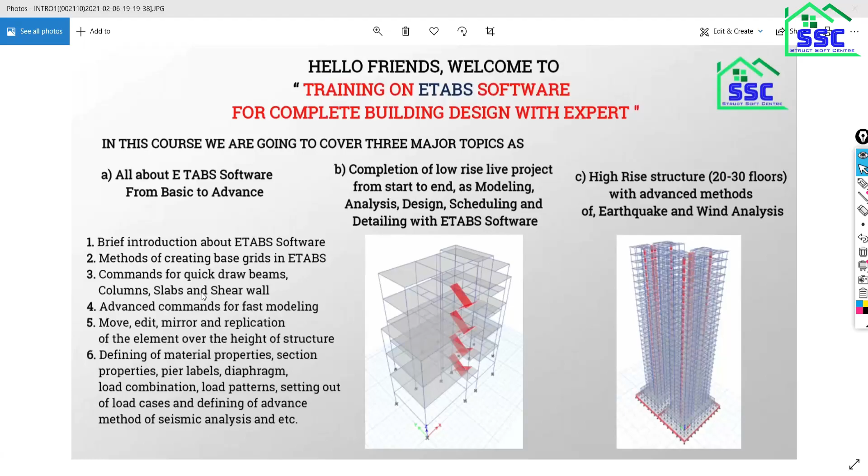We will check the stability of the structure with the advanced, new codes for high-rise structures: IS 1893 for earthquake, IS 875 Part 3 for wind load, and IS 16700 for high-rise structures. All these things we will cover in this entire training. Are you ready to finally start the session? This is just an introduction to this complete training course.

So you are all ready. Whatever version you have of the ETABS software, just double click on the icon of the software; it will take some time to open up. Right now I have ETABS 2017. See, whenever you open the ETABS software without an internet connection, this kind of welcome screen will open.

Here you can find this top ribbon, which is actually called the top main menu bar. What is this? This is called the top main menu bar. Whenever you start this software without an internet connection, as you can see here in the box, you will get this kind of welcome screen, and at the top you will get this top main menu bar.

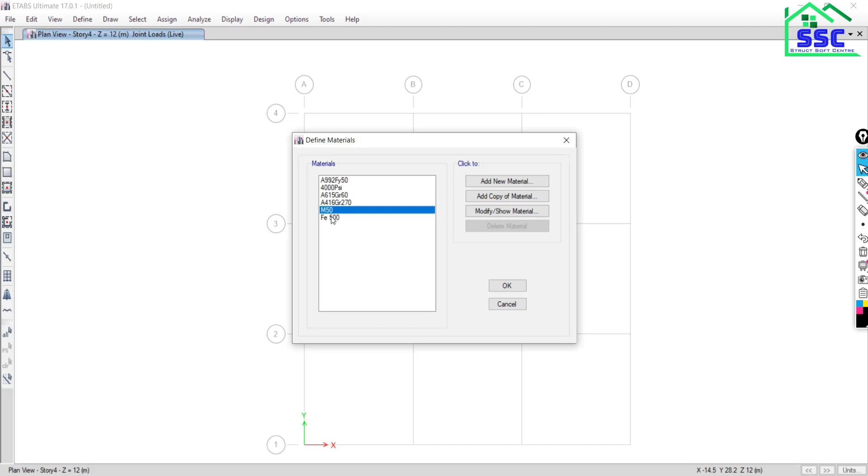See, when you go to Define, go to Material Properties, see, M50 is there, FE500 is there. Already two materials are there. We actually have not defined this material. Got it? But this is actually available from the master copy, from a master model.

Got it? Then go to Define, then go to Section Property, go to Frame Section. See, all the sections given here were actually present in the master ETABS model. Got it? So in this way you can use the second option. Just go to File, New Model, say no. Okay, again the Model Initialization dialog box will open.

Now you all might have understood the first option. You also have an idea about the second option. Now what is meant by the third option? Just click on the third option so that the remaining options become active. So display units, in which unit you actually want to work. ETABS has given 3 unit systems.

First is metric SI. Then the second one is US default, and the third one is the MKS system. So these 3 unit systems are given by the ETABS software. So if you want to work in kilonewton, meter, second and degree Celsius, you have to go with the first option, metric SI.

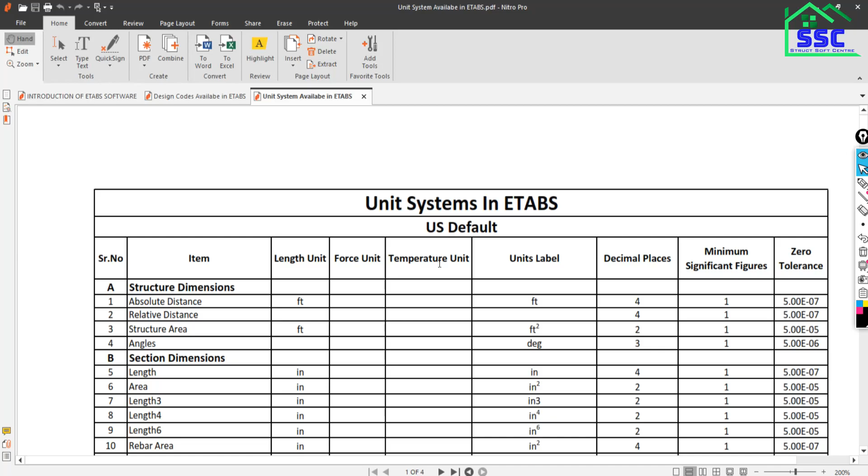So we have a database of which countries are included in the ETABS software, which you can find here. See, we also have unit systems available in ETABS. In US default, absolute distance will be measured in feet, and relative distance is also measured in feet. Structural area is measured in feet square. If you work with US default, you have to work with feet or inches.

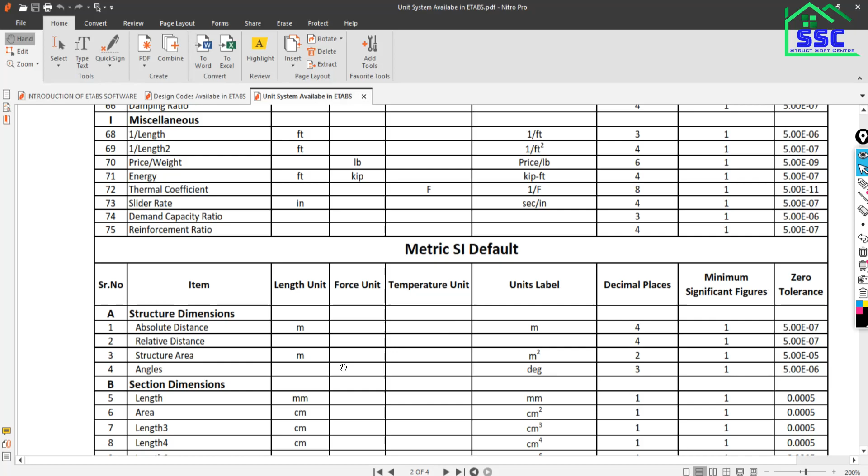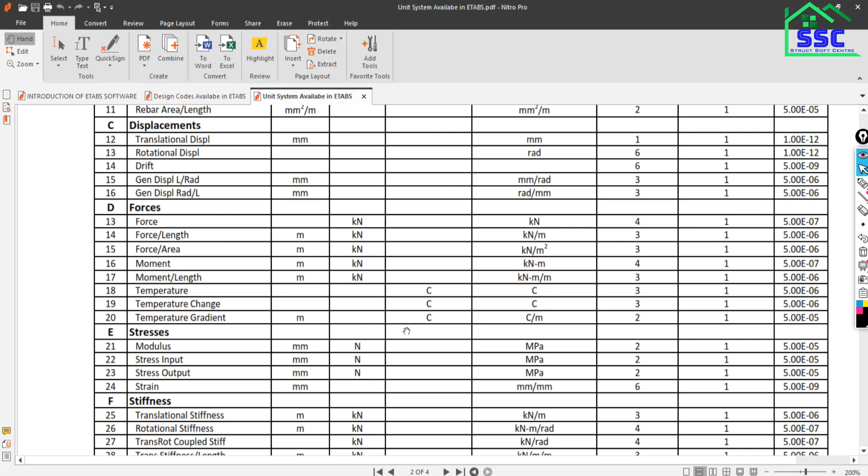Just keep in mind. And there is another unit system, metric SI, where you have to work with meter, kilonewton and degree Celsius. Okay, so that you have to use in the metric SI system.

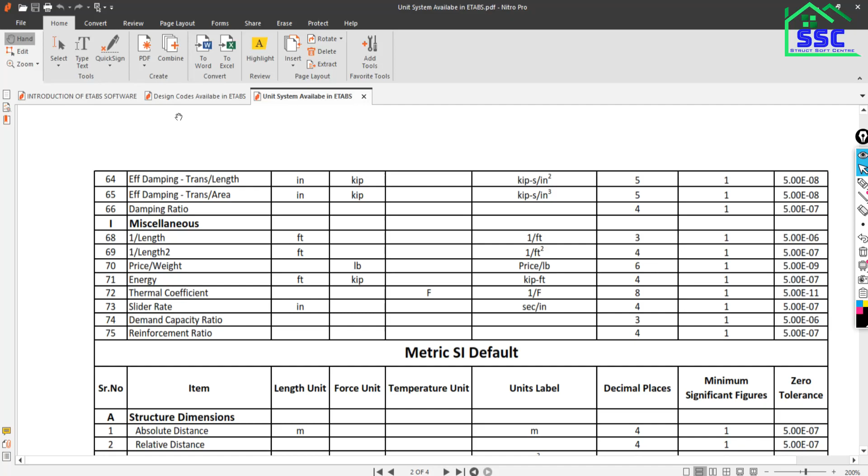So we have a database. I will share all these things with you, so you just have to read it out once. You will understand all the unit systems which are given in the ETABS software. Got it? Then, based on your country, you have to choose a steel section database.

Now the next is steel design code. Can you tell me which code we are using for the design of steel structures? IS 800 2007 is what we use for the design of steel structures. So based on your country and your requirement, you have to choose the code. Many countries' codes are given here, so choose as per your requirement. As our country follows IS 800 2007 for the design of steel members, we have to go with this.

For this we also have a database of design codes available in ETABS software. The RCC code is there, and country-wise steel codes and steel section codes available in ETABS are all given here. For RCC, IS 456 is our Indian standard, from the Bureau of Indian Standards. Singapore code is there, New Zealand's code is there, Mexican code is there. Different countries have different codes, and all those codes are included in ETABS software.

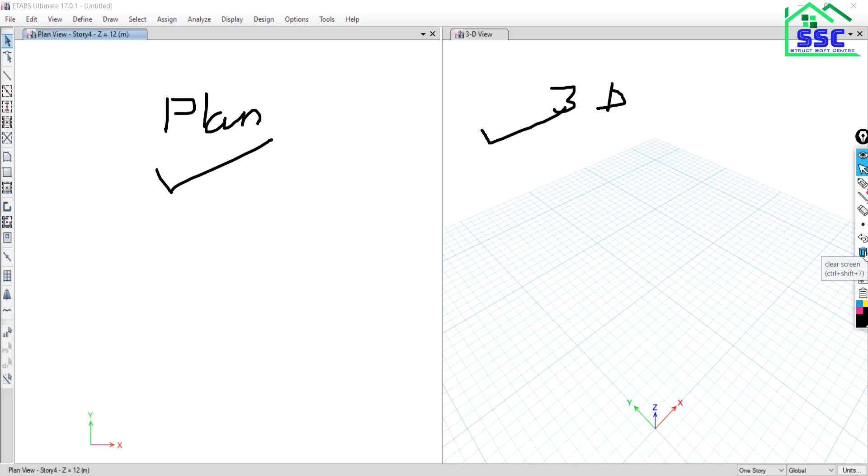But right now we are not interested to see the 3D view; we don't need to see the 3D view. So what you can do, you can close this window, you can close this view. How can you close this view? Just go to this side, and there you can find the cross option. Once you click here, this window will be deleted, and only the plan view will be there.

And if you want to add any window, you just have to click there: the window list drop-down option is there. Just click on this and click on the positive sign, add a new window. Just click here, add a new window, so that the new window will be open as 3D view. As you can see here, it is 3D view and it is the plan view.

Got it? You can also adjust the window. If I just don't want to see the 3D view, instead of deleting this window, you just keep the size as small as possible, so that the plan view will have more space to work. Got it? So this kind of thing you can do. So these are the two windows.

If you want to add one more window, suppose you want to keep the first window as plan view, the second window as 3D view, and you want to see the elevation view also, again just go to this and click add a new window again. So the third window will be open. If you want to add one more window, just go to add a new window. The fourth window will be open. So like that you can add the views, you can add the windows.

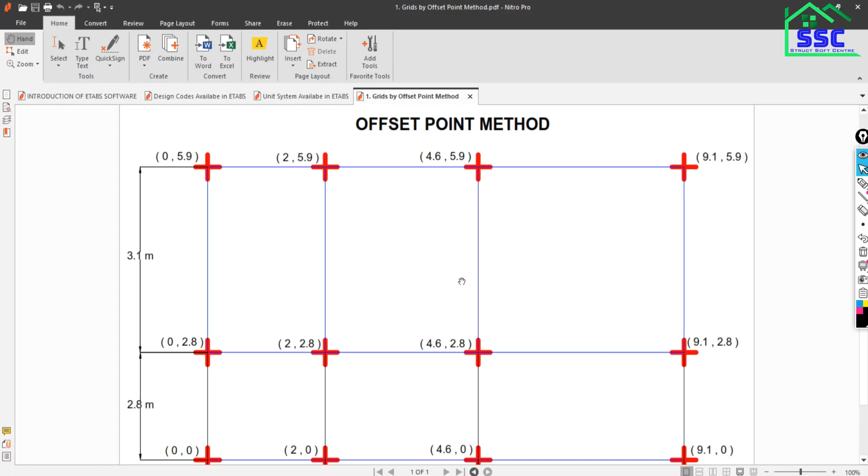So here, by the offset point method, we have to form these points, these grids, in ETABS software. As you can see here, this is the origin point. Is it visible? Yeah, this is actually the 0 point, the origin point, and I want to create these grids in ETABS software.

So what you need to do is go to ETABS and go to Draw, because we have to draw the grids. So you need to go to the Draw section, just go to Draw.

Once you click on draw, you can find draw joint objects. Just click on this, and a new dialog box will open up asking for the ordinate of your point. I want to take this joint as the origin joint, so wherever you want to put your first point, you can take it. I'm not putting any dimension here, so just click here.

The joint has been drawn here. Now the next point is at a distance of what? In x direction it is 2 meter and y is 0. So from the origin it is at a distance of 2 meter.

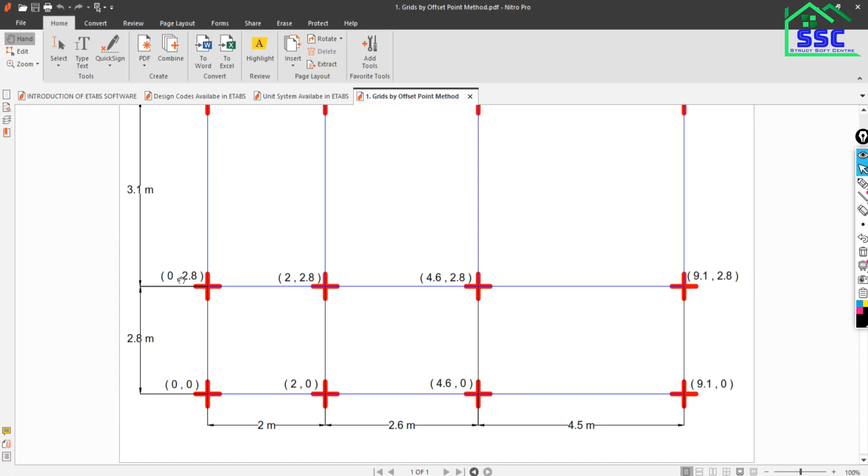Now all these joints are at an offset distance of 2.8 meter in y direction. So just put 0 in the x ordinate, and in the y ordinate put 2.8, which will become 2800. Just click on this, so at an offset distance of 2.8 meter the new joint will be generated. Just click here, click here, click to this point, click to this point. So like that you can draw the new joints at offset distance of 2.8 meter in y direction.

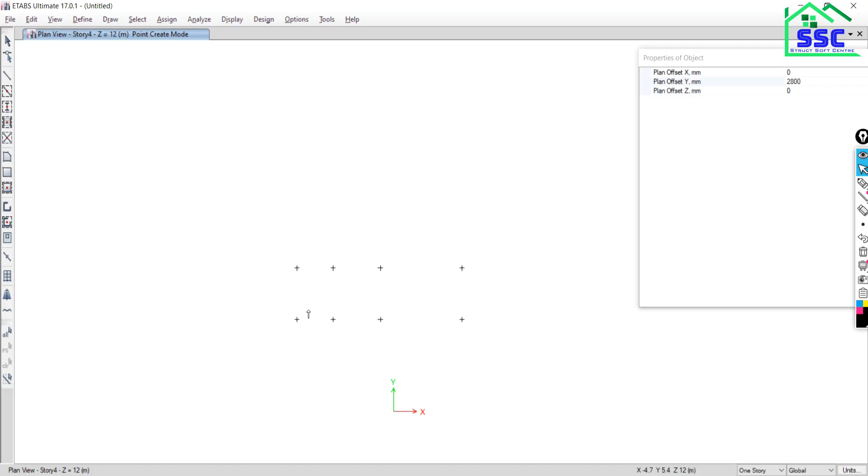Now come back. Can you tell me how much distance is there vertically between these two joints? Exactly 3.1 is there. So 3.1 in mm, how much will it be? Exactly 3100 in y direction. Just put here, click here and click here, click here. So like that all the joints are generated as per our grid requirements.

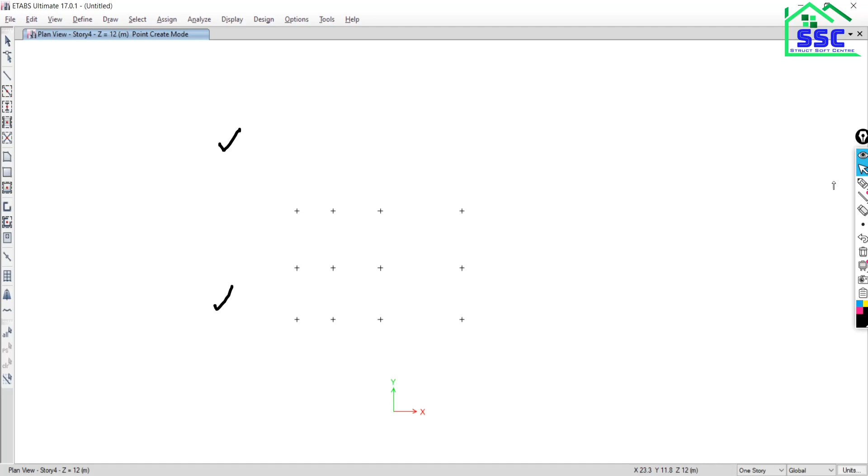But all these are actually just joints, not the grids. We actually have to form the grids from these joints. So how to convert these joints into grids? That's a very simple thing. What you have to do is just go to edit—

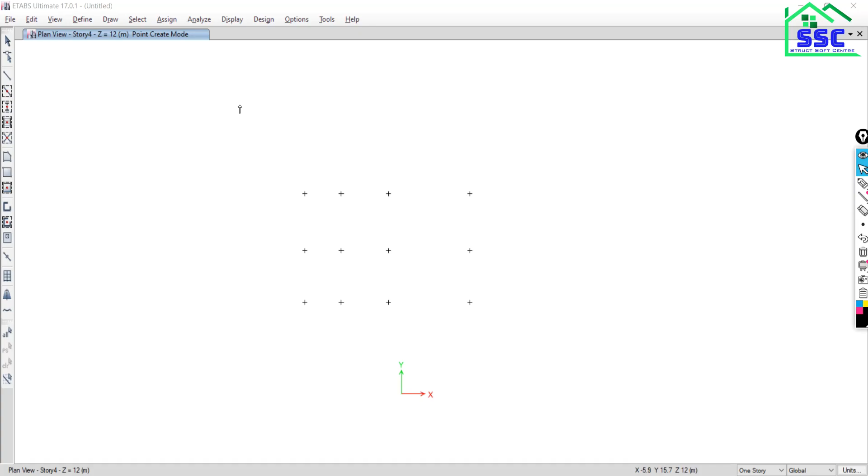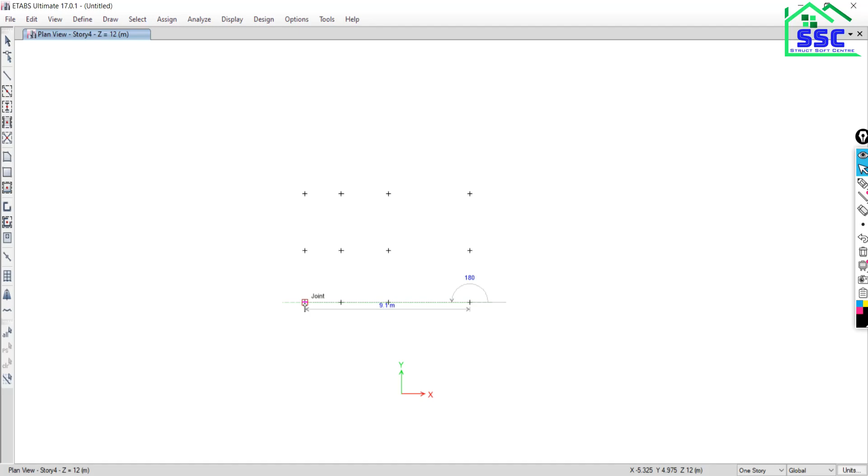Sorry, you have to go to draw. There you will find draw grids option. Just click on it. Once you click on this, it will ask you in which grid system you want to draw the grids. By default it is G1, let it be G1. Just close this, and from the left point move freely to the right end point and click on it, then move freely to the left end point and click on that point. See, the grid line has been drawn.

Is it visible? The numbering of the grid is 1. Now just click on this point and freely move to the next end point in the same line, click here, so the grid naming will be 2. Move from this point to this point, the grid will be 3. Then move to this point at the top, this will be 4. I just want the naming at the top.

Suppose I just want the naming at the bottom. What you have to do is move from this point to this point, so the naming will be on this side. Did you get it?

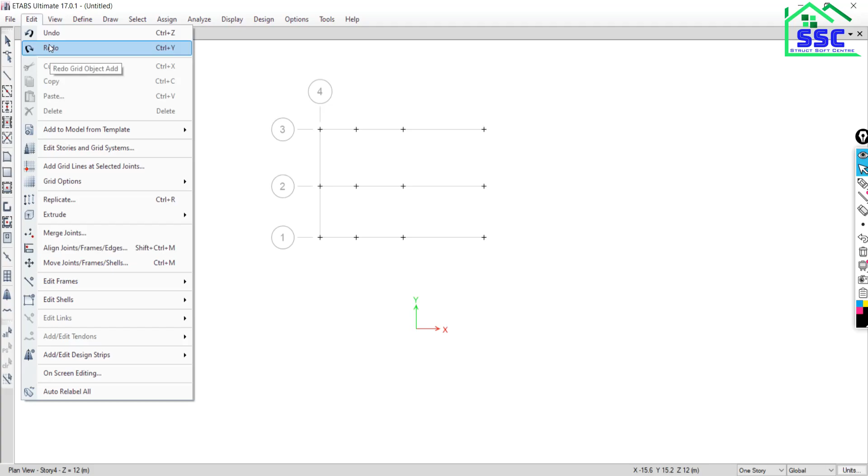Just go to edit, undo, and the last operation will be deleted. If you want to go back, go to edit and click on undo. And if you go forward, use redo.

Got it? So all these commands we will discuss in detail, every point, everything in a very detailed format. Just keep patient and cooperate with me, so that you will understand each and every thing of this software.

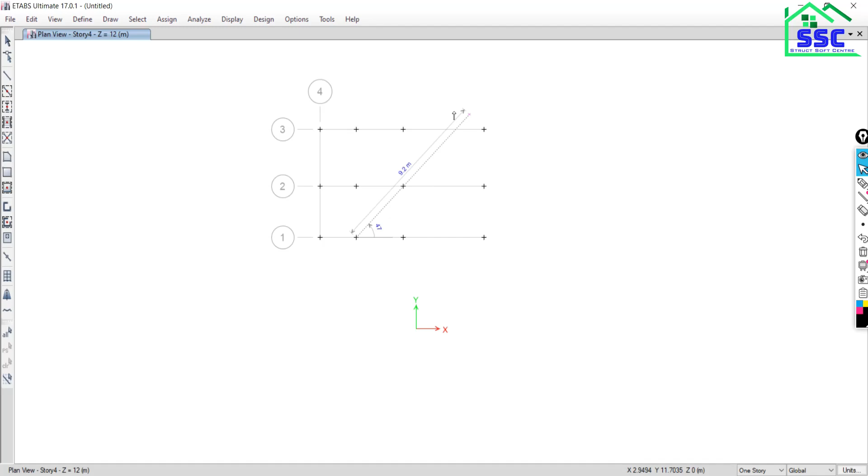Now click on this point and freely move to the next point, so the grid labeling will be 5. This is called grid labeling, which we'll discuss in the second method in detail, including how to do the labeling. Now click on this point and move to the next point, so the grid will be 6. Now click here and move to the next point, so the grid will be generated there.

So this is the first option by which you can form the grids in ETABS software. You have to understand how you can prepare the grid lines for your project.

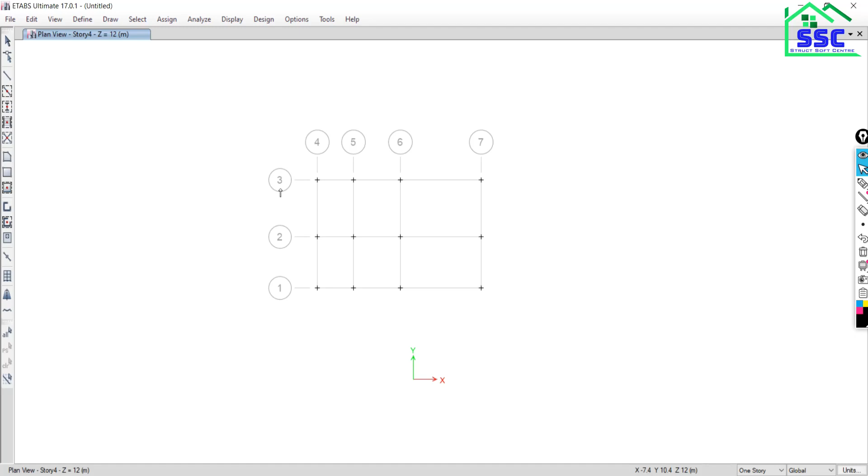Suppose your project is very complicated, and I just want a point here, a particular point here, another here, another here. These kinds of grids you have to form, and that also you can do by the offset point method.

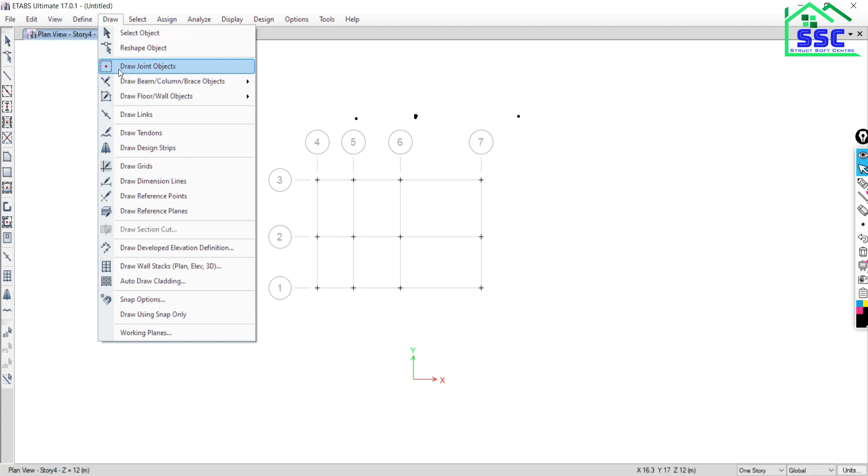So what you need to do is go to draw, draw joints, and at this time I just want the point at a distance, for example, of 3500 in the x direction, and at the same time the offset in the y direction is 4500. Just click at the point so the new joint has been drawn there, as you can see.

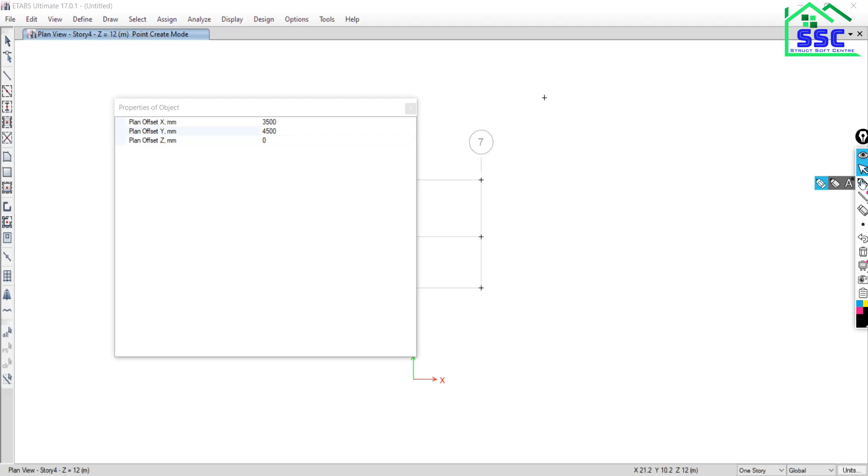Similarly, at the same offset distance, I want the joint in reference to this point. So it will be generated there, there, and there.

Okay, now I just want to take the grids along these two points. So what you can do is go to draw and go to grid lines. Got it? Just close it and move.

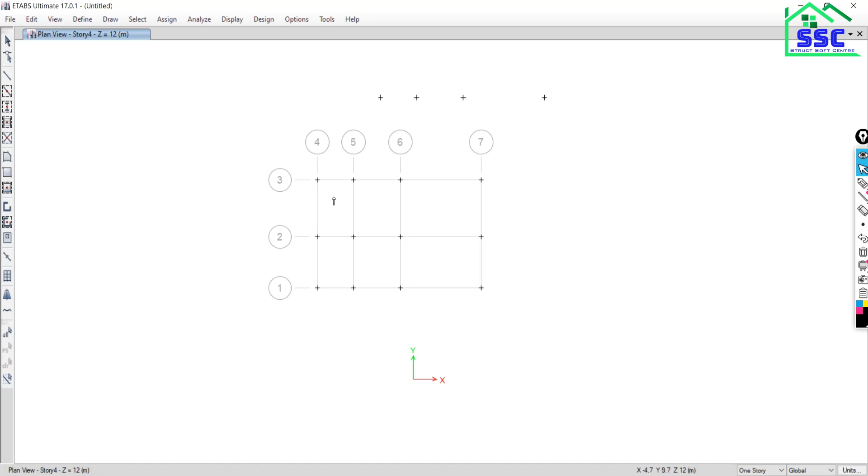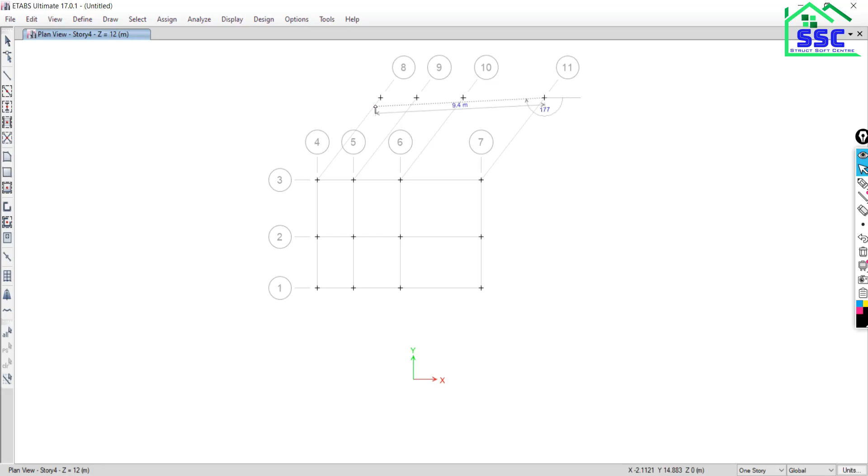Just click on this point and freely move to the next point, click and move again, click and move again. In this way, these additional grids are added there, and this grid is like that. So for complicated geometrical plans, you can also use the offset point method to form the grids.

Suppose your architectural plan is like this, suppose the building in-plan geometry is like this. This kind of architectural in-plan grid, you can't model simply. You can model it by different methods, no doubt, but it is a second level method of forming the grids. It's not a simple architectural plan.

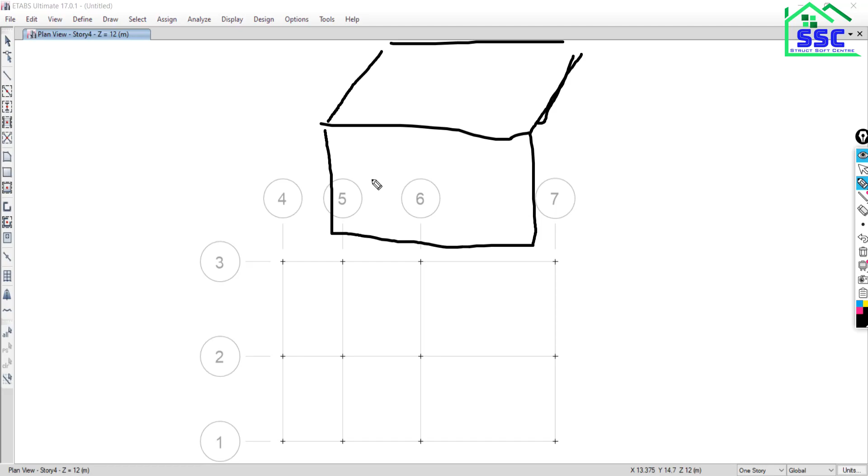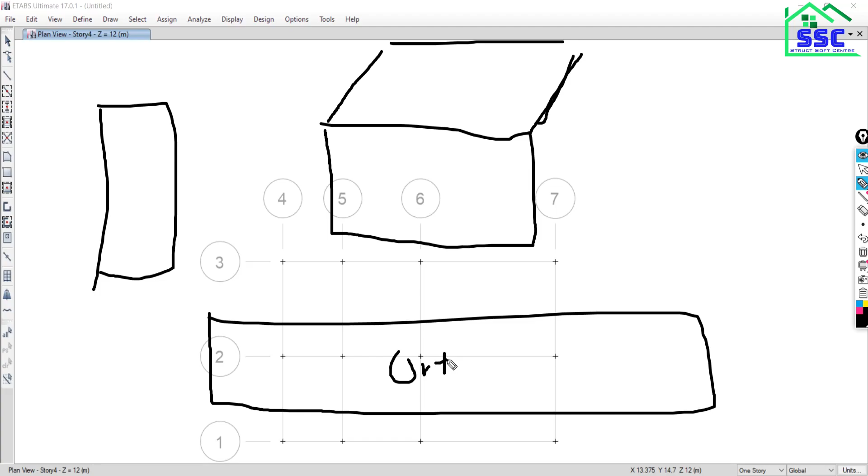Okay, suppose your plan is like this, suppose your plan is like this. This kind of plan is called an orthogonal plan. What do we mean by orthogonal plan? Can you tell me? Is it a simple in-plan geometry, or not a simple geometry?

If you are able to define both dimensions, or both directions of your structure in plan geometry, perfectly in the principal directions, then you can call it an orthogonal structure, an orthogonal building. If your in-plan geometry is such that both the dimension and direction of your building is exactly parallel to the x and y direction in plan, then your building is orthogonal. But suppose your building geometry is like this...

Are you able to define both the x and y directions here? This line is actually inclined, we can't say it's along the x direction. Can you say this line is along the y direction? No, it is in between the x and y coordinates. So this is a non-orthogonal building, while the other is an orthogonal building.

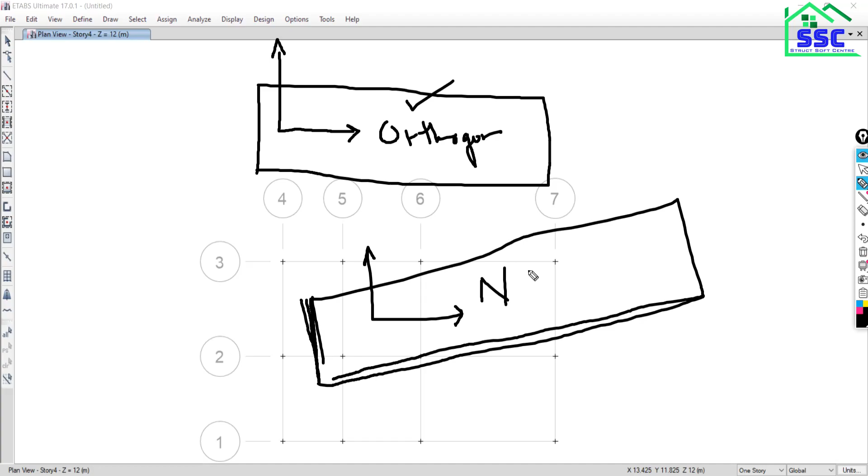We will discuss this in detail in high-rise structures. When we discuss high-rise structures, there will be a lot of discussion on orthogonal buildings and non-orthogonal buildings, and what influence they have.

What are the things that matter with orthogonal building and non-orthogonal building? That's another discussion. For the orthogonal geometry, you can

prepare the grid lines in an easy way. But if you are getting complicated geometry, a complicated architectural plan, then you have to take the effort

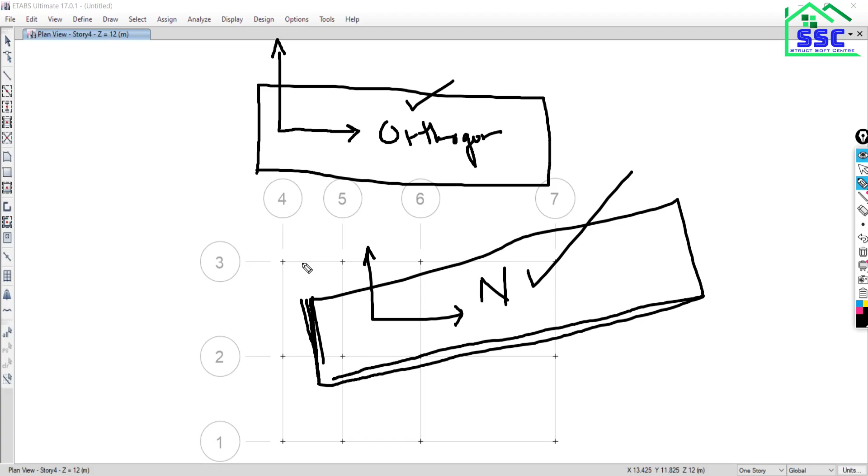to form the grids. There are many options. One option is the offset point method. Using the offset point method, suppose our geometry is like this - plan is there, and this is also a plan, not elevation, not 3D. In plan, the geometry of your building is like this, and we have to form the grid like this.

Got it? So how can you do this? This simple plan we have already completed. We have to complete this inclined part. How can you do this?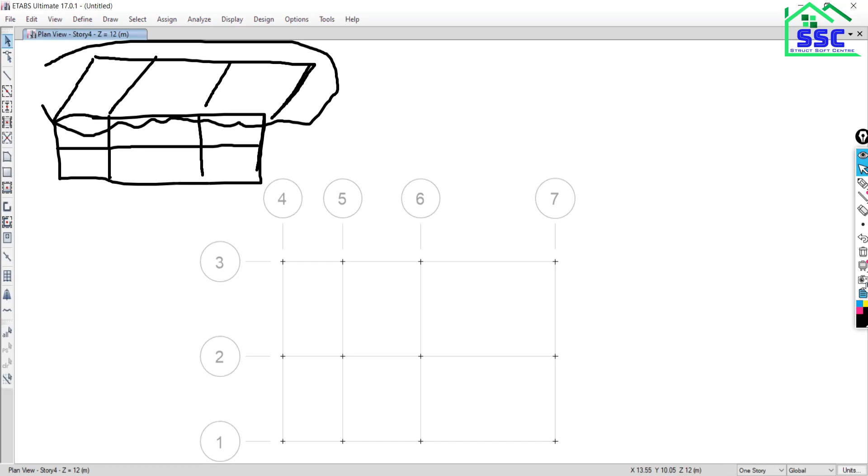Just go to draw. Choose draw joint objects. Just click here, and here, for example, this point -

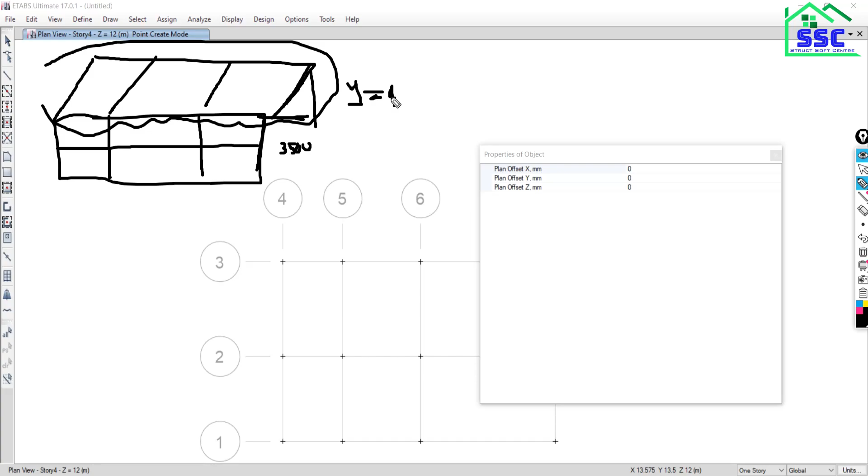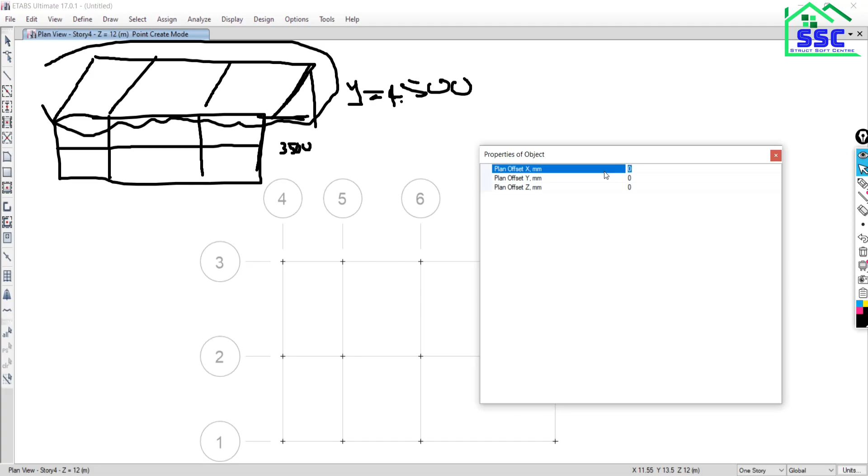this point is at a distance of 3500 mm, and in the y direction it is 4500 mm. Got it? How much is it? 4500 mm - it means 4.5 meters, it is 3.5 meters. So you have to put this dimension at the same time. Let it be 3500 in the x direction and 4500 in the y direction.

Just close it. Click here, so that joint will be generated there, that joint will be generated there, that joint will be generated there. What you actually have to do is just click on the base point, so from that base point, at an offset distance of the given distances, the new joint will be drawn there. Got it?

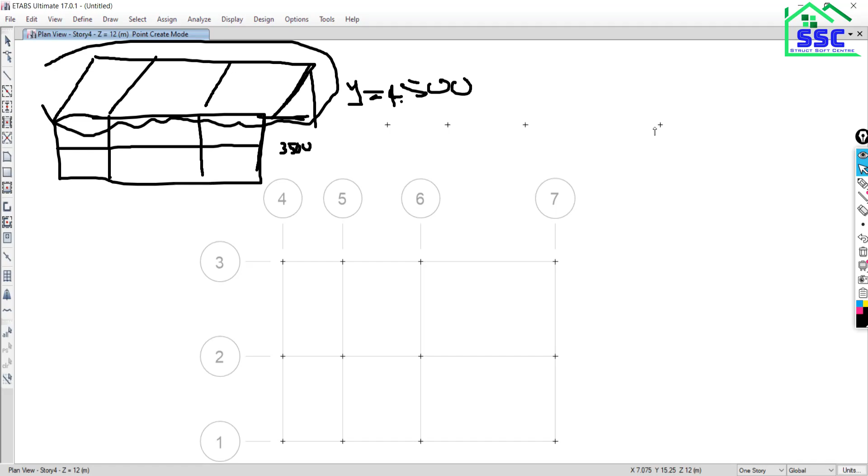So only the joints we have created there. We also have to form the grids here. So what you need to do is just go to draw, and go to draw grids.

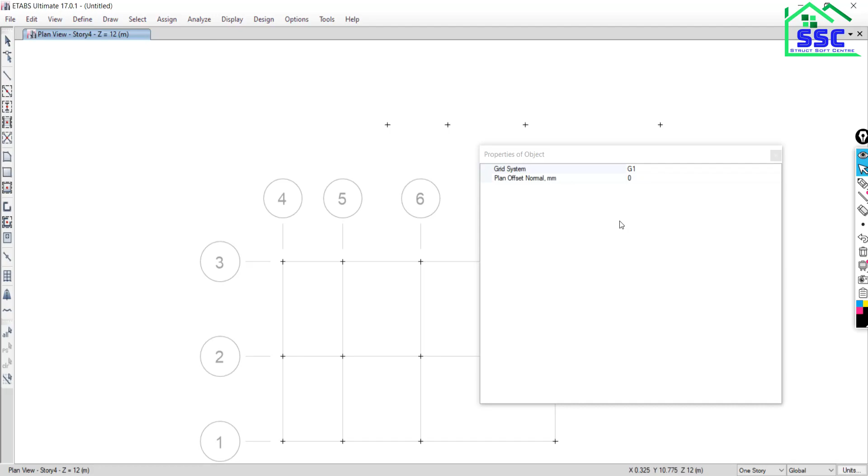Once you click on draw grids, just close it. Click on this base point and freely move to the next point where you want to end your grid lines. Just click here.

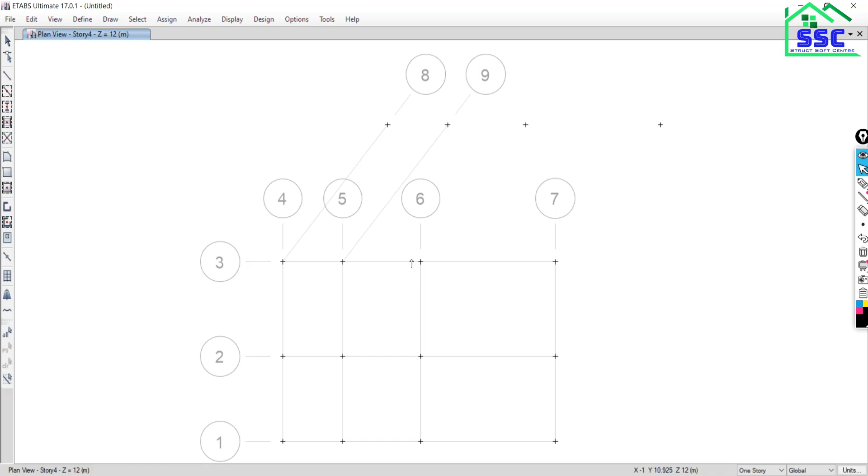So this grid labeling is what? Can you tell me? 8 number. When you move to this point, this is 9 number. When you click on this point and move to the next point, this will be the 10 number. And when you click on this point and move to the next point, that will be your 11 number.

Just click on this point - suppose these are 1, 2, 3, and this will be 4 number. Just click on this point, left point, right point, freely move to the next point, so that the number will be 12.

In this way you can complete the plan grids for your architectural plan, for your complicated geometry. Using the offset point method, you can complete any kind of geometry, you can form any kind of grids. Got it? There is no limitation for forming the grid lines for any kind of project.

Any kind of structure, any kind of structural plan geometry of your building, you can complete with the offset point method. You all got it? So this is all about forming the grids using the offset point method.

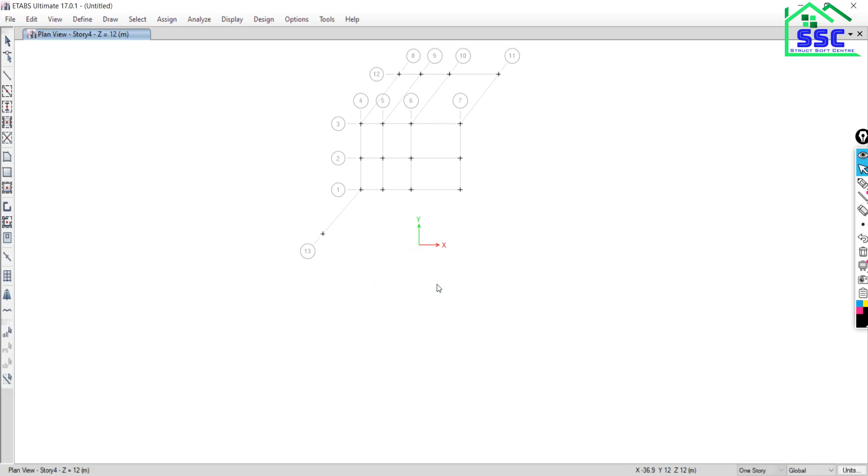So the next point is the most important method of forming the grid - using the quick templates of the ETABS software. When you go to file, go to new model, just say no, and you all know what these options are, so I'm not going to discuss it again. Just go to the third option and say okay, and this is new model quick templates.

So to form the grids we are using this method also - using the ETABS quick templates, the most important method of forming the grids in ETABS software. So there's a lot of things we have to discuss here, and a very important point especially for the gridding.

So this is the second option, and the third option is the import and export method. We will see these two methods in the next session. Got it? So here we conclude our session with the first option, the offset point method. In the next session tomorrow, we will see how to form different kinds of grids using the ETABS templates.